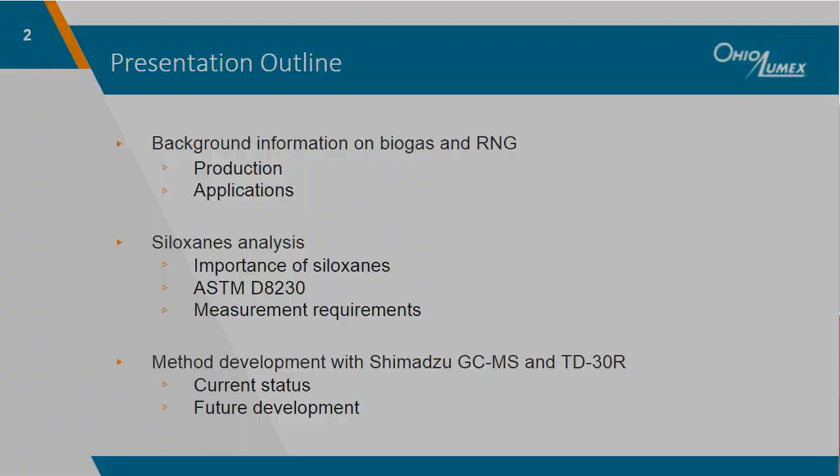Before we get started, I'd like to give you some background on Ohio Lumex so you can understand our experience and perspective in tackling the problem of siloxanes analysis. Ohio Lumex is a global leader in emissions measurements, which for over 20 years has primarily worked with coal-fired utilities, cement production plants, and industrial boilers.

The great majority of this work has been related to sorbent trap manufacturing and measuring mercury emissions produced by these sources. Mercury was the bridge that brought our company into the gaseous fuels industry. Over the last few years, our company has diversified into multiple fields, including the development of new continuous analyzers for process control, emissions, air quality, and gaseous fuel quality applications. Our company has gained a reputation for developing methods to analyze difficult analytes in difficult sample matrices. This includes siloxanes in biogas and RNG, where there are a variety of measurement challenges.

Okay, now that I've given you some background, let's get into the main content of the presentation. First, we need to start with some definitions.

Many attendees to this webinar series may already be familiar with biogas and RNG, but I suspect there are many who are not, so let me explain what these gaseous fuels are. Biogas is a mixture of gases produced from anaerobic decomposition of organic matter. It is usually composed of 50 to 75% methane, with the great majority of the remainder being CO2. When organic matter decomposes in an anaerobic environment, methanogenic bacteria thrive. These bacteria break down the organic matter and produce methane. As I'll explain in the next slide, this gas comes from a variety of sources and can be used for a wide range of applications.

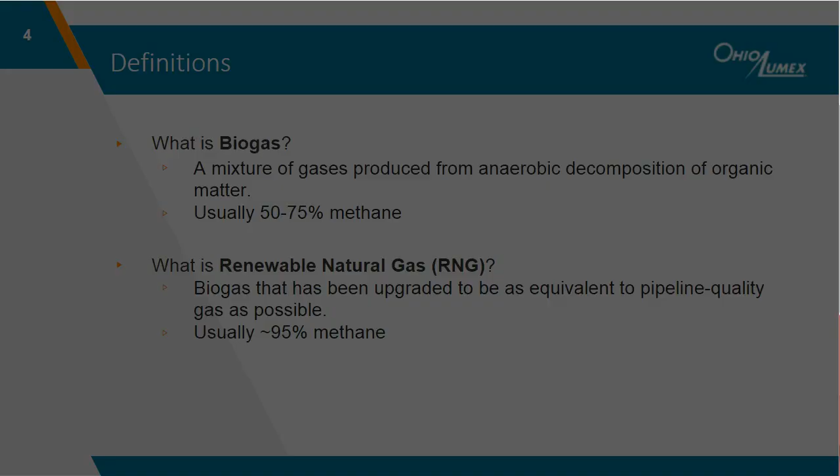The important thing to understand here is that biogas is created from a wide variety of waste products. The nature and concentration of contaminants you find in the biogas depends on the type of waste. For example, siloxanes come from the silicones present in man-made products such as shampoo, soap, cosmetics, oils, lubricants, pharmaceutical products, and a variety of other types of waste. When these products break down in a landfill or anaerobic digester, they end up in the gas stream. This causes several problems, which I will explain later in the presentation.

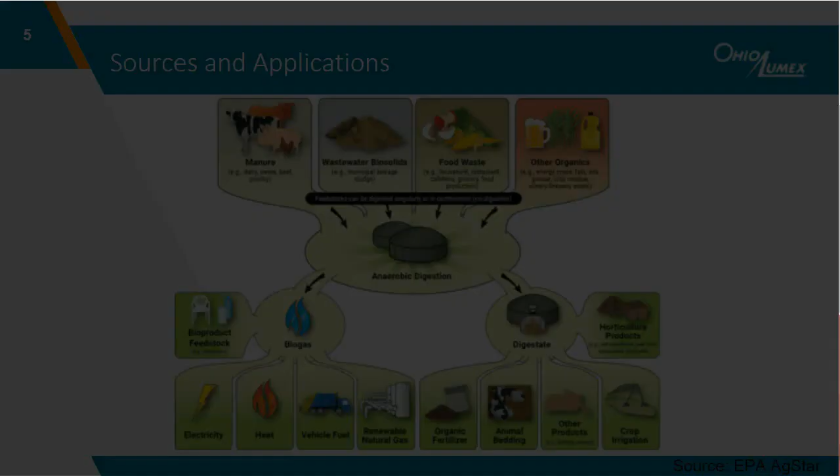Let's go into a little more detail on the purification process, using a landfill as the example feedstock. At a minimum, raw biogas coming from the landfill needs to be treated to remove most of the particulate matter and water. This must be done even if the intent is just to send the gas to a flare, which essentially just burns all the biogas without extracting any work out of it, in order to convert methane to CO2. If the gas is to be used for a biogas application, moisture must be removed to a greater extent, and siloxanes should be removed. I say should, and this is important, because many biogas sources throughout the United States are not removing siloxanes, which is why they are having problems. To be fair, the type and extent of gas treatment should be based on the feedstock as well as the application. But in the case of landfill gas and wastewater treatment plants being used for gas-to-energy applications, siloxanes should be removed or they will create problems.

All right, so if we look at the final stage of purification, we have biogas being upgraded to renewable natural gas. Essentially, the purification process is the removal of CO2, oxygen, nitrogen, and VOCs. This is done with pressure swing adsorption and membrane systems, ideally resulting in about 95% methane with minimal contaminants.

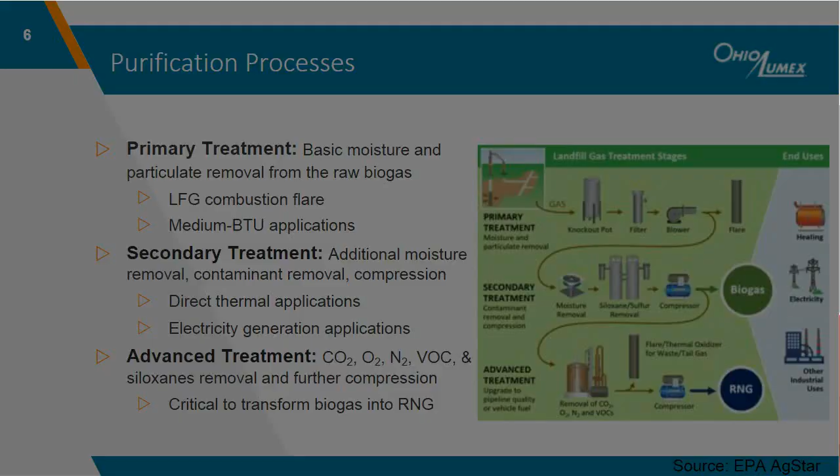RNG has three primary applications, and all three of these are negatively affected by siloxanes. First, RNG can be used as a vehicle fuel. I mentioned earlier that biogas can also be used as a vehicle fuel, but it's important to note there are different engines rated for different methane concentrations. RNG is meant to be interchangeable with fossil natural gas, the kind we get out of the ground, whereas biogas is not. That means we should be able to compress RNG to form CNG and use that fuel in natural gas vehicles.

Secondly, RNG can be used to produce electricity in the same way fossil natural gas is used, via gas turbines. Finally, and this is the application that is really gaining momentum in the United States, RNG can be injected directly into the natural gas grid and mixed with fossil natural gas. That gas is used for residential and commercial thermal applications like stoves, gas furnaces, etc.

Utilities that own the pipelines are very concerned about the quality of the gas that RNG producers inject into their system, and these utilities have gas quality specifications that the RNG producers are required to meet. Gradually, we are seeing more utilities across the country adopt more detailed and strict gas quality specifications that include siloxanes.

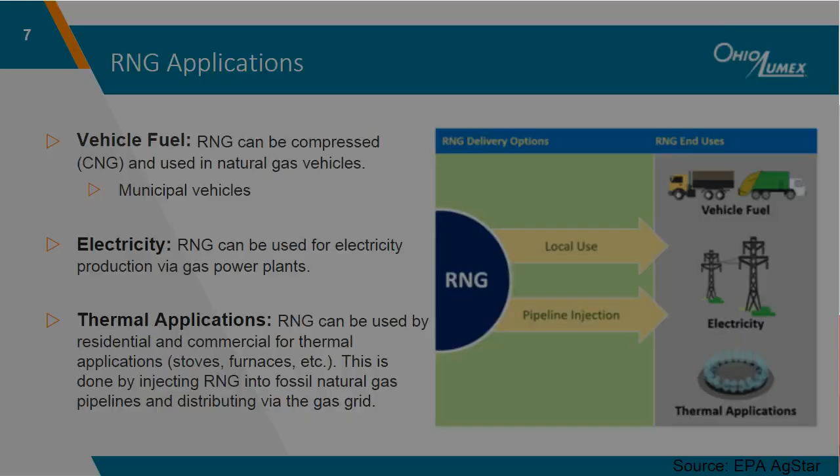At this point, you might be asking yourself, why would we want to use RNG at all if the gas quality is so concerning? Well, the key here is that it's renewable. RNG is carbon neutral or carbon negative, depending on how you characterize it.

Let me briefly explain. RNG is considered carbon neutral because it comes from organic sources that, before dying, absorbed carbon dioxide from the atmosphere during photosynthesis. Whether the waste is food, paper, cardboard, wood, or manure, the carbon in that waste originally came from a plant removing CO2 from the atmosphere.

When the RNG is burned, CO2 is produced and released to the atmosphere, and the net change in atmospheric carbon is zero. Now, if you take a step further and consider how methanogenic decomposition, if left alone, releases methane rather than CO2, you can see how RNG can be considered carbon negative.

Methane is a much more significant driver of climate change than CO2 because it is more effective at trapping heat in the atmosphere. Therefore, it is preferable that methane be converted to CO2. RNG creates a financial incentive for methane to be utilized as efficiently as possible, ensuring we capture and convert methane that would otherwise be unused and allowed to escape to the atmosphere.

Utilization of RNG can also improve local air quality by replacing diesel or gasoline vehicles with less polluting natural gas vehicles. It is becoming more common for gasoline and diesel waste collection trucks, city buses, and other municipal vehicles to be replaced with natural gas vehicles. It's especially beneficial when cities utilize what would otherwise be a useless waste product as the fuel for those vehicles.

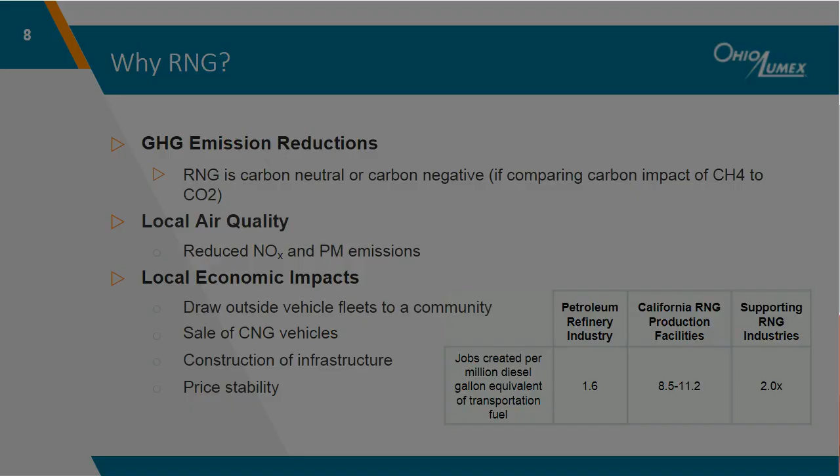This is probably a good time to talk a bit about the chemistry of siloxanes. Siloxanes are characterized by their silicon-oxygen-silicon linkage. The siloxane functional group forms the backbone of silicones, which explains why they are in so many man-made compounds.

In siloxanes analysis, we focus on measuring the concentration of 9 different species: trimethylsilanol, L2, L3, L4, L5, D3, D4, D5, and D6. The species beginning with an L are linear siloxanes, and the species beginning with a D are cyclic siloxanes. Trimethylsilanol is technically a silanol, not a siloxane, but it's grouped with the rest because it contributes to silicon dioxide formation and can often be found in biogas.

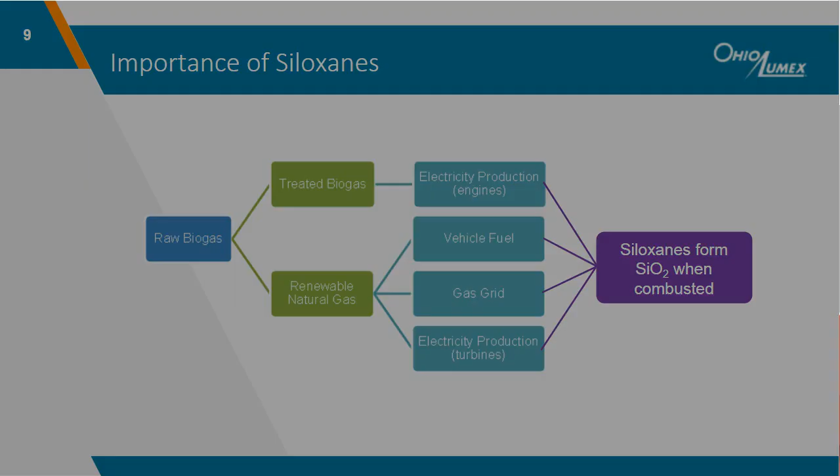For engines, such as in biogas to energy or vehicle fuel applications, silicon dioxide creates a variety of mechanical issues, such as damage to pistons, cylinder heads, and valves. Periodically, these engines need to be partially disassembled, the silicon dioxide accumulation needs to be removed, and some engine parts may need to be replaced. The net effect is that the engine operator needs to spend more money maintaining the engine than they would otherwise, and in the case of gas-to-energy producers, the engine will spend more time not producing electricity.

For gas turbines, the problem is similar. Over time, turbine blades will become coated with silicon dioxide, resulting in a pressure drop within the turbine, as well as corrosion and capacity reduction. Again, this results in more maintenance costs and loss of operating uptime.

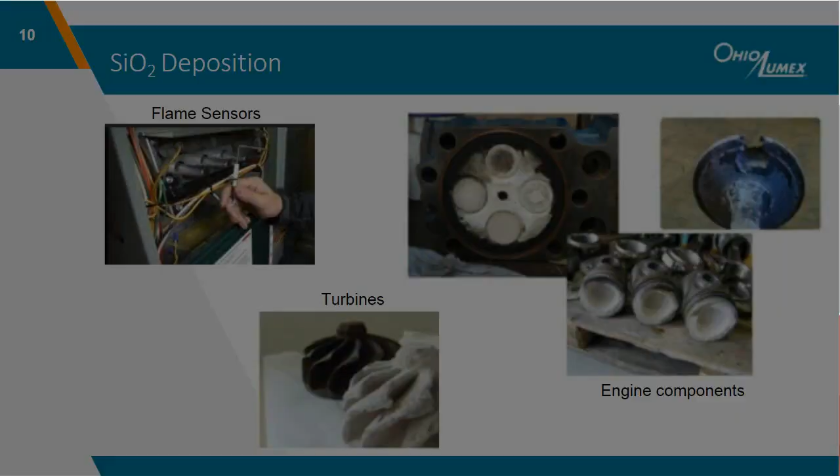In order to measure siloxanes, what options are available? Well, that depends on whether you want continuous measurements or grab sample analysis. For continuous siloxanes measurements, Ohio Lumex has a GC-IMS analyzer that will measure each of the 8 siloxanes plus trimethylsilanol independently up to once per hour, then report speciated and total concentrations.

This is useful for monitoring biogas and RNG siloxane scrubber integrity in order to ensure the material is replaced on time, but not replaced so frequently so as to produce an unnecessary increase in operating expense. It can also be used for other applications like pipeline gas quality monitoring.

For grab sampling, and I mentioned this earlier, there's a standard ASTM method called D8230, which was published relatively recently in 2019. This method prescribes 3 different sampling approaches: Tedlar bags, Summa canisters or high-pressure cylinders, which we can group together because they're functionally similar, and sorbent traps. The analytical methods include GCMS, GCAED, and ICP-MS.

For sorbent trap analysis, the prescribed method includes extraction of siloxanes using methylene chloride, also known as dichloromethane, which, as you may know, is quite toxic. I'm on the ASTM D03 committee and plan to add thermal desorption to D8230 as an alternative method to analyzing sorbent traps for siloxanes for a variety of reasons, which I'll explain in the next couple of slides.

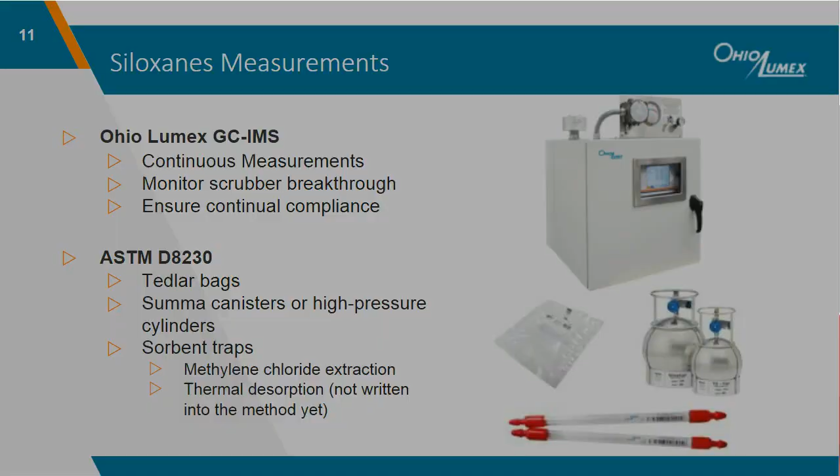Each of the methods prescribed in D8230 has disadvantages when compared to sorbent traps with thermal desorption. The use of Tedlar bags is particularly problematic for multiple reasons. Of course, our laboratory and most other laboratories will accept Tedlar bags for analysis, but in our opinion, it's the least preferred method of collecting sample gas and shipping it to a laboratory.

First, there's the issue of sample stability. Sample gas contained in a Tedlar bag will eventually be diluted by ambient air as sample gas leaks out and ambient air finds its way in. Additionally, some extremely light compounds, such as hydrogen, can exit the bag with ease, resulting in very inaccurate measurements. For these reasons, D8230 specifies a Tedlar bag sample must be analyzed within 72 hours of sampling, and some bag manufacturers even recommend 48 hours.

Tedlar bags may also introduce siloxane contamination due to there being silicone-based materials in the valve stem. For example, I was once doing a project for a gas-to-energy customer and filled one of their Tedlar bags with pure nitrogen, then sent it off to their usual laboratory for analysis. The concentration of siloxanes in the nitrogen sample was similar to what was found in the customer's treated biogas, which of course made everyone skeptical of all prior measurements.

Finally, Tedlar bags do not provide the best sensitivity since analysis is done with direct gas injection. Obviously, a very sensitive instrument can overcome this shortfall, but compared to concentration on a sorbent trap, direct gas injection results in far higher limits of quantitation expressed as a concentration in the source gas.

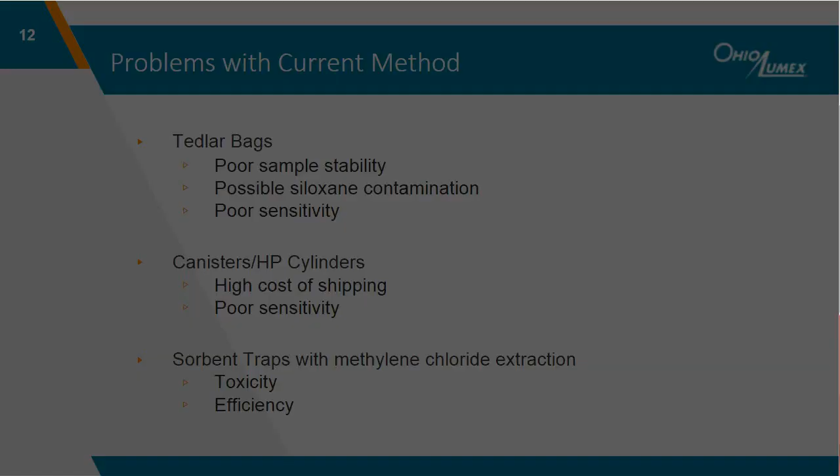I mentioned earlier how some utilities and trade associations are establishing tariff limits, which include maximum allowable siloxanes. In the case of California, both SoCalGas and PG&E have established the same limits and have defined two different thresholds called a trigger limit and a lower action level, with the trigger limit being the lower of the two.

Essentially, an RNG producer's required measurement frequency and freedom to inject RNG is based on whether they are below the trigger limit, between the trigger limit and the lower action level, or above the lower action level. The trigger limit is 10 micrograms of silicon per cubic meter of gas.

We have established a limit of quantitation for all 9 measured species, and if we assume all species are present in the sample, we have a total sample LOQ of 21.6 picograms expressed as siloxanes. Again, temporarily ignore the fact that trimethylsilanol is a silanol. In the end, everything is converted to a silicon basis, so that won't matter.

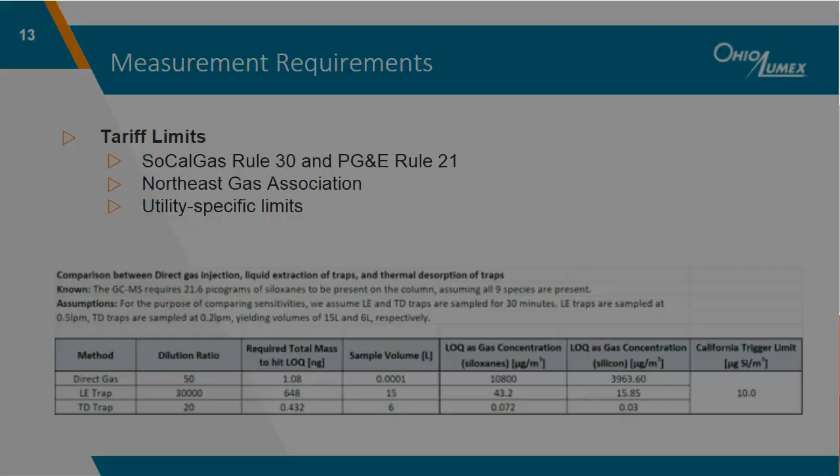The principle of operation is relatively straightforward. A sample sorbent trap is put in the autosampler, and when analyzed, it is put in line in the TD30R. The sample trap is heated to 300°C while nitrogen flows through it and carries siloxanes out of the sample trap and into the cold trap over the course of 10 minutes. The cold trap contains special sorbent materials that collect all the siloxanes, after which the cold trap is heated and all the siloxanes are released over a short period of time to the split valve and then into the GCMS.

The advantage to this method, to reiterate what I stated previously, is that all the siloxanes from the sorbent trap are sent to the split valve, whereas with the liquid extraction method, we only retrieve a small fraction of the total siloxanes and then send that to the split valve.

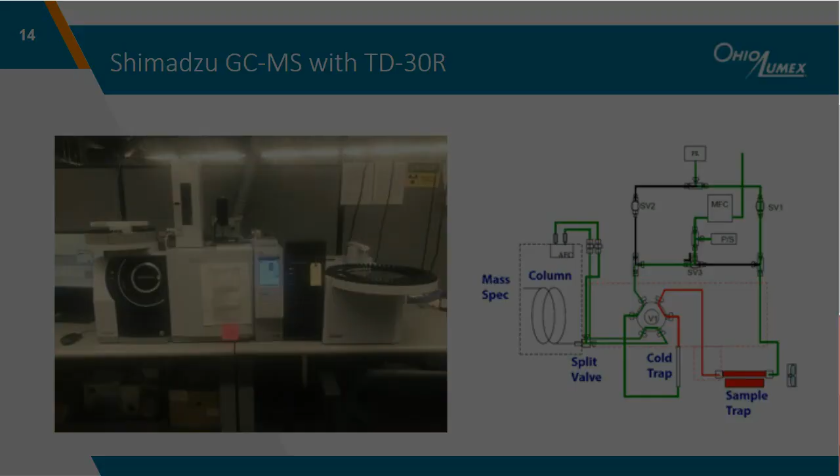Now that you've gotten a basic overview of how the system works, I can break down the individual challenges we faced in developing this method. We have had the instrument for several months now, and in that time we have made significant progress in developing a thermal desorption method for traps.

There were 3 primary aspects of the method that needed to be developed and optimized. First, we needed to determine the best sorbent trap material or materials. There are 9 different species that need to be captured, and they exhibit a wide range of behavior when it comes to interacting with sorbent materials.

This process took a long time, but in the end, we have found a combination of 2 materials that, when used in series within a single trap, allow for total capture of all species without making it impossible to then desorb those siloxanes onto the cold trap. The first section captures heavy species, while the second section captures the remaining light species.

Second, we needed to determine the best cold trap materials. We've conducted multiple experiments using a variety of cold trap materials, including Carbotrap B, Carboxen 1000, Tenax TA, and a few others. Finally, analytical parameters needed to be optimized. This was primarily related to cold trap temperature, sample trap desorption duration, the GC column itself, and split ratio.

Also, I want to be clear, the method is still undergoing further optimization, so although it meets the relatively loose requirements described in D8230, we can't quite say it's finished.

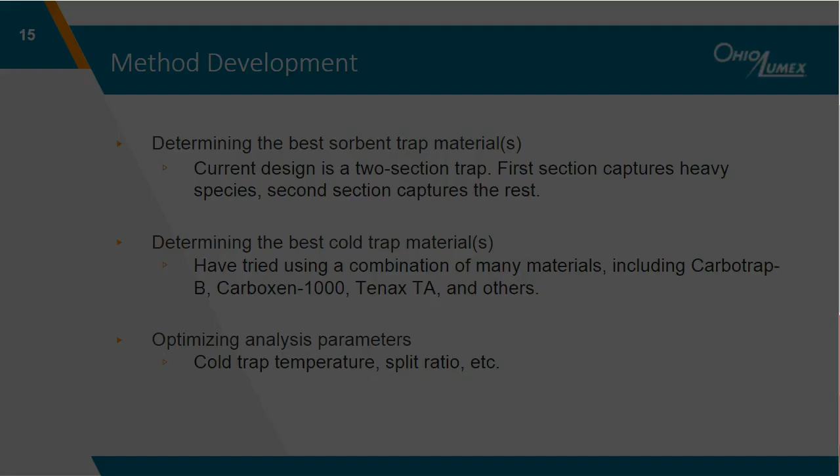The second section is activated carbon. During the course of our method development, we found that carbon alone would not work, as it was impossible to completely desorb the heavy species. By separating the species into 2 sections, we are able to recover all siloxanes.

I'd like to mention a couple other basic points about sorbent traps here in case it isn't clear. Sorbent traps are sampled with gas flowing in one direction, but during desorption, the nitrogen gas is pushed through the opposite end of the trap and flows out of the trap inlet.

Additionally, it is important to understand that traps are always sampled in series. That is, a single trap run includes 2 of these sorbent traps sampled in series, with 4 sections of material total. The first trap should capture all siloxanes, while the second trap is used to determine breakthrough. With our current trap design, using our in-house gas spiking apparatus, we have not observed breakthrough.

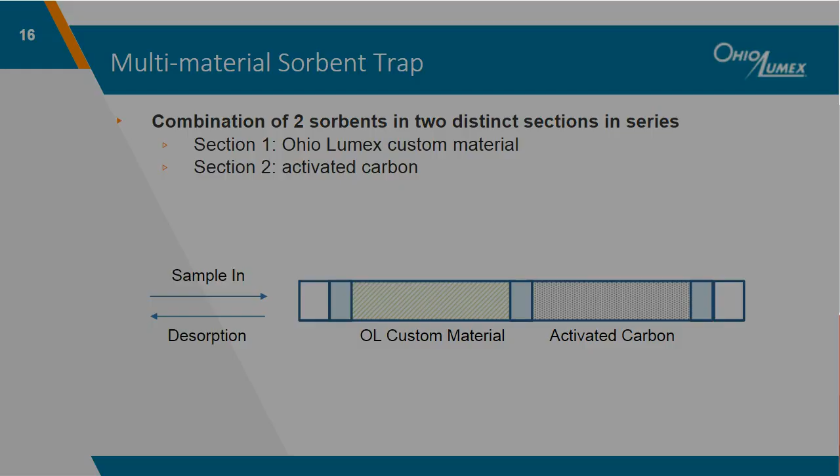Sorbent traps are connected to the glass tube, and a pump with mass flow controller is used to pull the vaporized siloxanes through the sorbent trap or traps. This approach was used to test various sorbent materials.

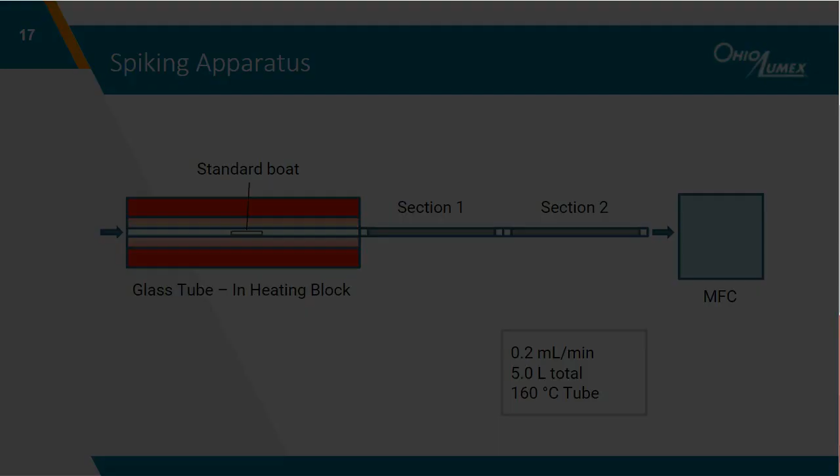So finally, if we examine the current status of method development, we can say that it is nearly complete, as the method satisfies the requirements described in ASTM D8230. Sorbent traps can be used as calibration standards using the vapor spiking method, and these traps can then be desorbed to create a calibration curve which satisfies the correlation coefficient requirement of 0.99 prescribed by D8230.

Similarly, if we compare the mass of each siloxane species recovered via thermal desorption to what we recover using liquid extraction, we measure close to 100% as expected. This is not, however, the case for trimethylsilanol.

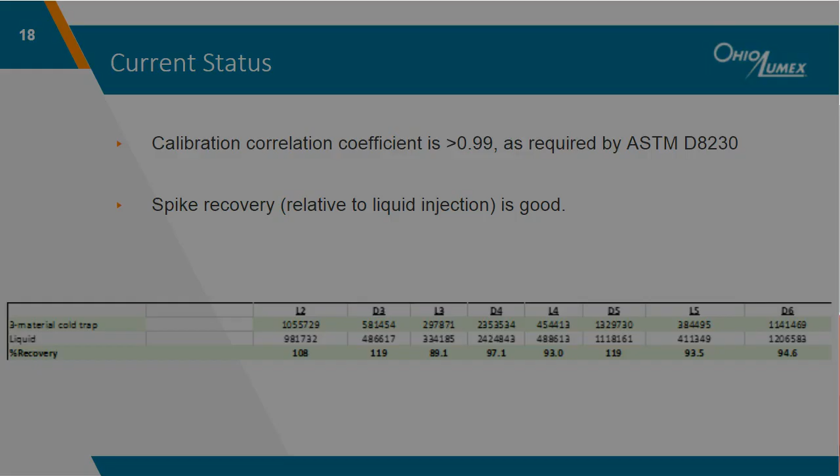Although the performance of the method satisfies the D8230 requirements for creating a calibration curve with a correlation coefficient greater than 0.99, this is only true for 8 out of 9 species. Trimethylsilanol needs work, and we believe we are closing in on a solution right now.

Regarding trap breakthrough, the sorbent trap is performing wonderfully and will likely not need to be optimized further. Spike recovery can probably be improved as we continue to optimize parameters and try other cold trap materials, although the measured spike recovery is currently well within acceptable limits.

After the method is fully developed, we will update ASTM D8230 and submit the method to committee for ballot. In addition to adding thermal desorption, we will likely add more detailed calibration and analysis QC, as well as a recommendation that sorbent traps be sampled in pairs to allow for a pair agreement calculation. As we close out this research, other opportunities for method improvement will likely arise and be incorporated into D8230.

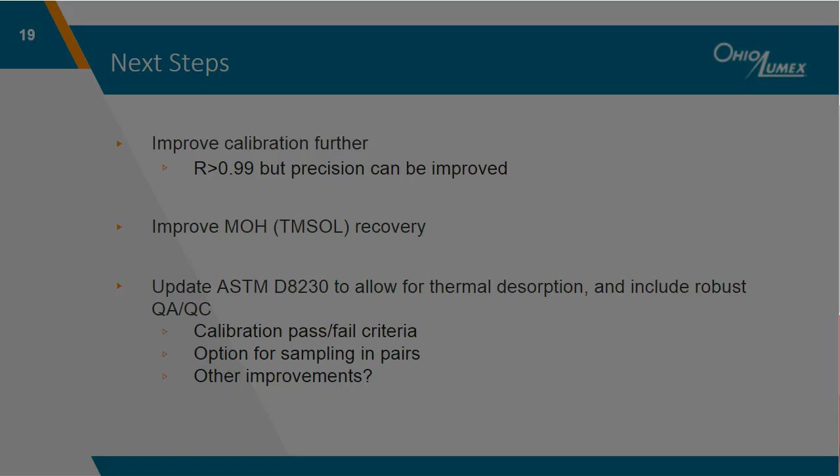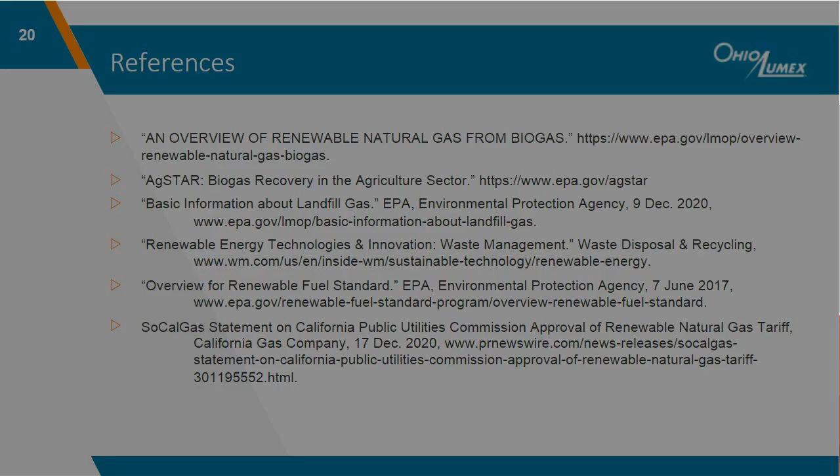I want to thank Heather Juzwa and Shimadzu for their part in this work and for giving me the opportunity to present today. I also want to thank all of you for taking the time to listen in, and I hope you learned something new.